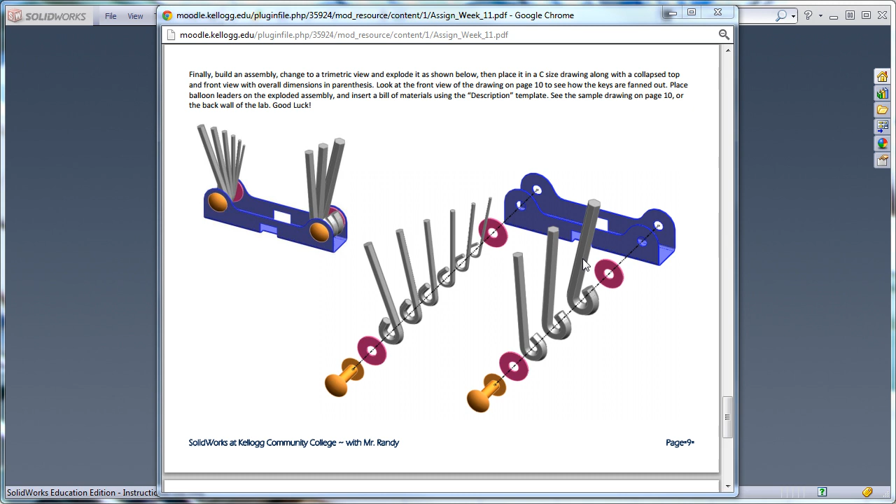So again, the final output, always good to see where we're going to end up. It will be a C-size drawing with a couple of 2D views and an exploded assembly with balloon leaders and a bill of materials.

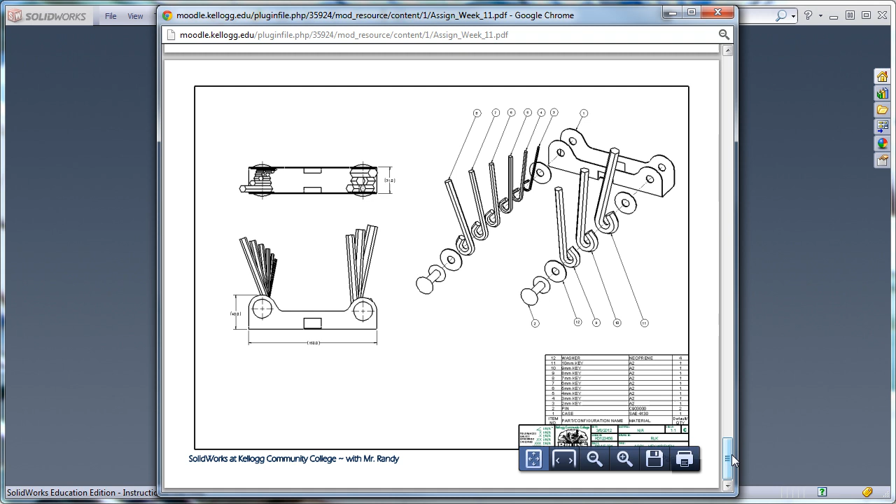And so this is where we're going to end up. I want to back up to the case and have you take a look at this first.

And what we're going to do with the case is we're going to extrude it. We're going to turn it into a sheet metal part, then flatten it so we can put these notches in and cut them, and then fold it back up.

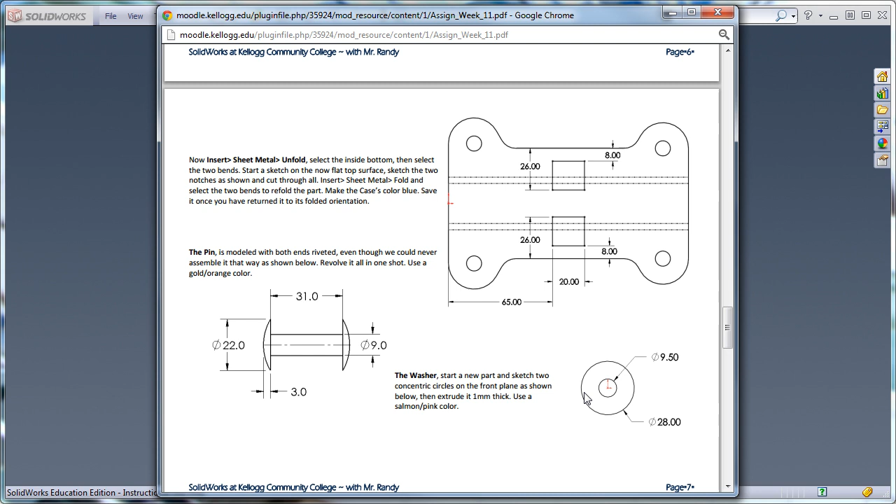The pin is a simple revolve, so draw half of this. Yes, you can get it right with just these 4 dimensions if you use relations properly. The washer should be the easiest thing you've done this year.

And then we're going to do the hex key. The hex key is actually going to be a sweep. So we're going to take this hexagon profile and we're going to sweep it along this path to get the hex key. And then we're going to create a design table, actually in Excel, to control the dimensions for the various hex keys.

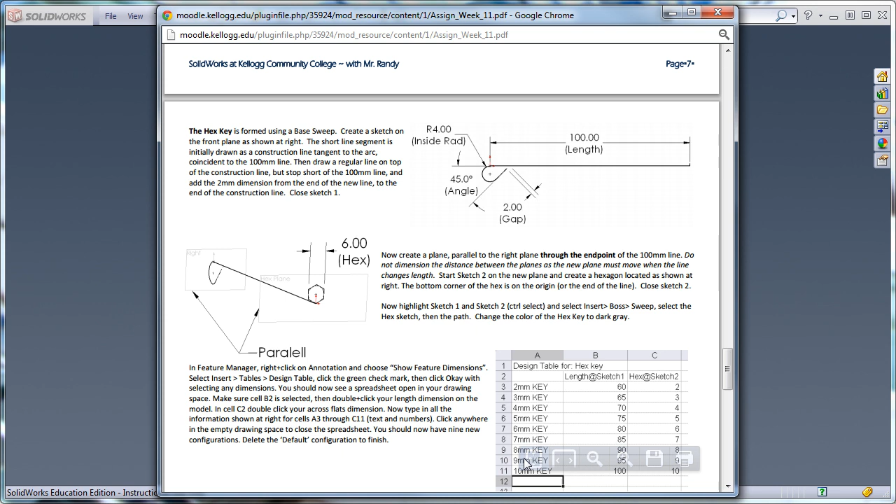So let's take a look at some of this here. Let me get that out of the way. All right, so let's start a new Solidworks part.

And we're working in metric for this one. And we're going to go to a front view and start a sketch. And I'm just going to real quick draw up the shape of that.

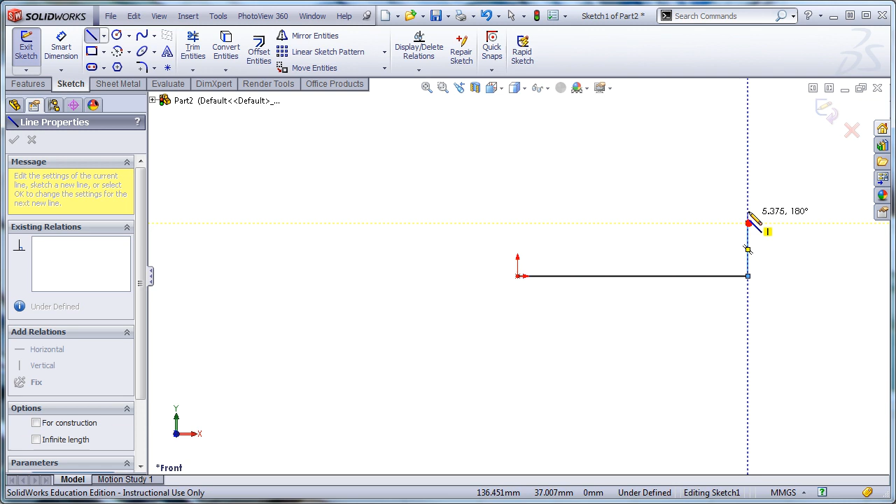Like so. And let's get some dimensions on here. I'm going to go pretty fast. You should be able to do this kind of stuff without too much trouble.

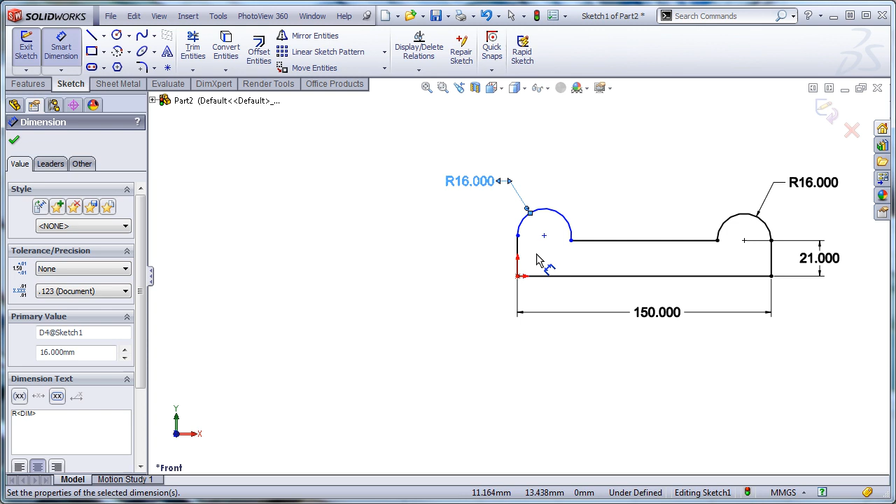And then we're going to draw a couple angled lines in here. And I goofed that one up, so I'm going to have to get a tangent relation in there.

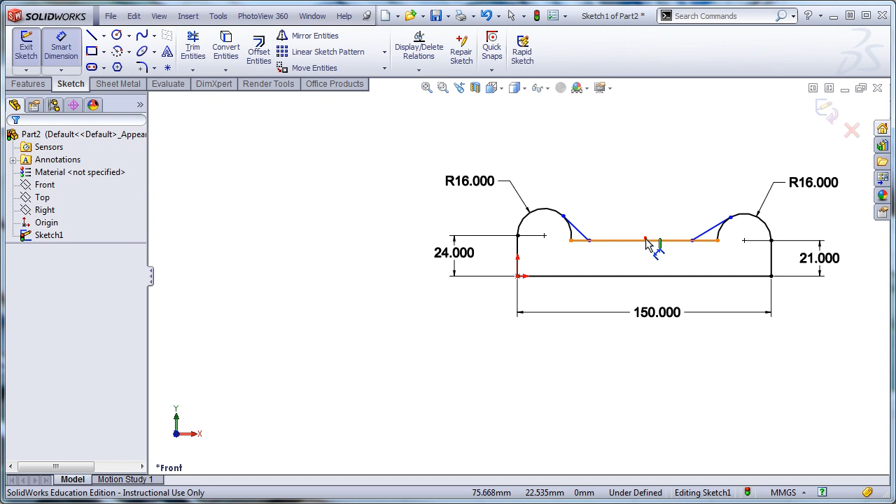And then we can do a dimension, so we can get this 120 millimeter or 120 degree for both of these.

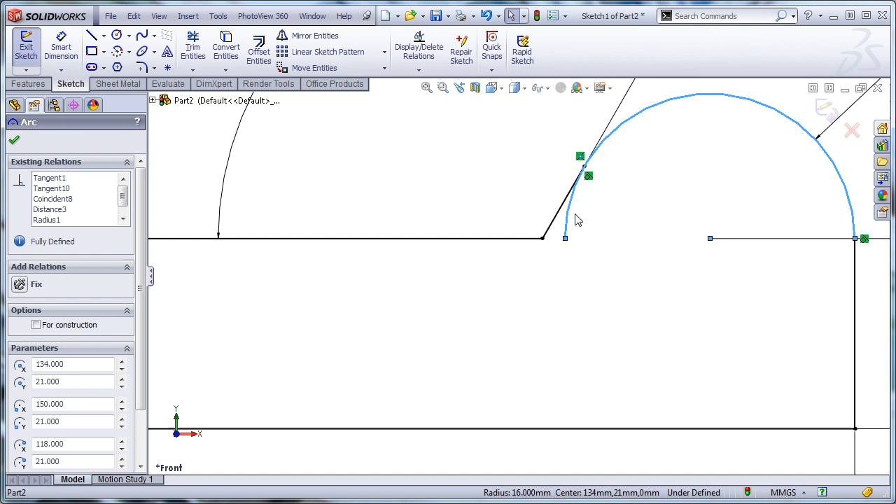Let's trim that up. Undo. And there's the outward shape of our case.

We're going to extrude that, 31 millimeters.

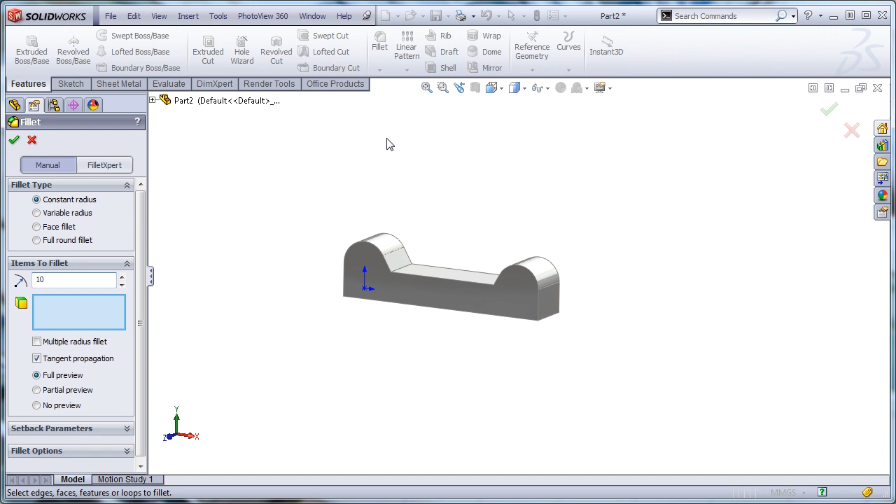Now we're going to apply a 10 millimeter fillet in here. So let's go to the fillet tool. You want to do this separately, it tells you that in your drawing notes, but make sure you read them. And we'll put a 10 millimeter fillet there and there. Doesn't work so well if you put that in the sketch.

Okay, next step is to shell this out. So I'm not going to cut the holes yet. We're going to do a shell, so we'll click on the shell tool.

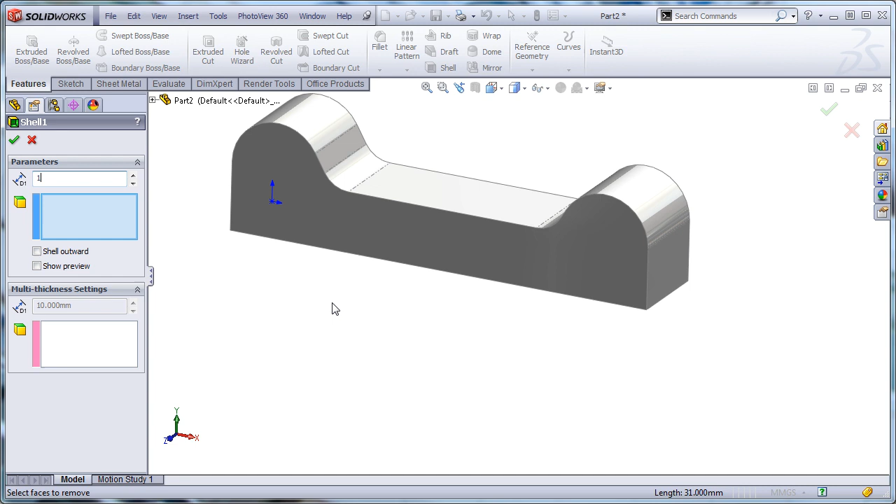You've used this before. The material thickness is 1 millimeter, and we're going to take out all of these faces, and finally that one, and we'll hit OK.

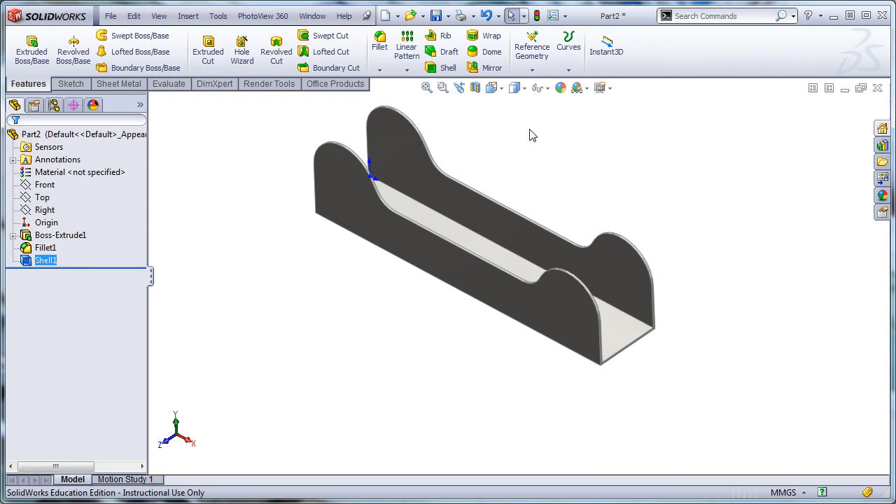So it kind of almost looks like a sheet metal part now, but it's not. Again, you have directions in your handout for this, but I'm going to show you how this works. I'm going to pick the bottom surface, and then I'm going to go to Insert, Sheet Metal, Bends.

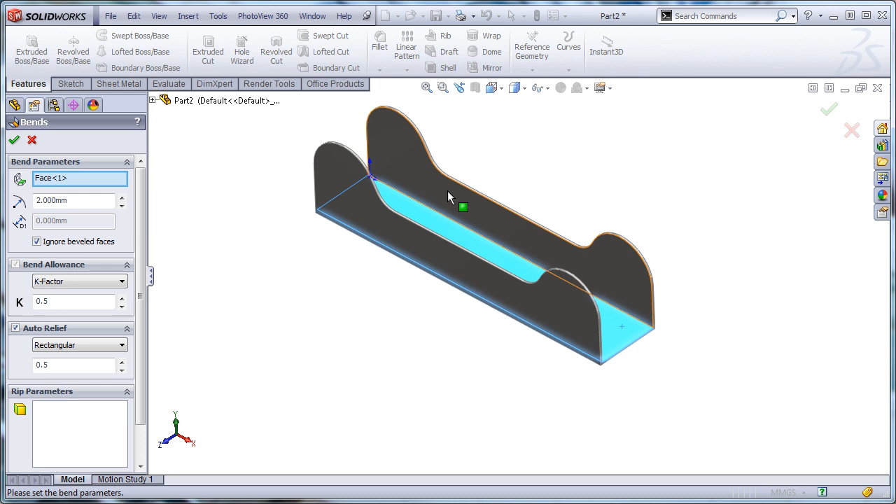We're going to set the radius at 2 millimeters. Material thickness should be given already by the thickness of the part, and we're going to hit OK. There are no rips or anything to deal with, and now this is a sheet metal part.

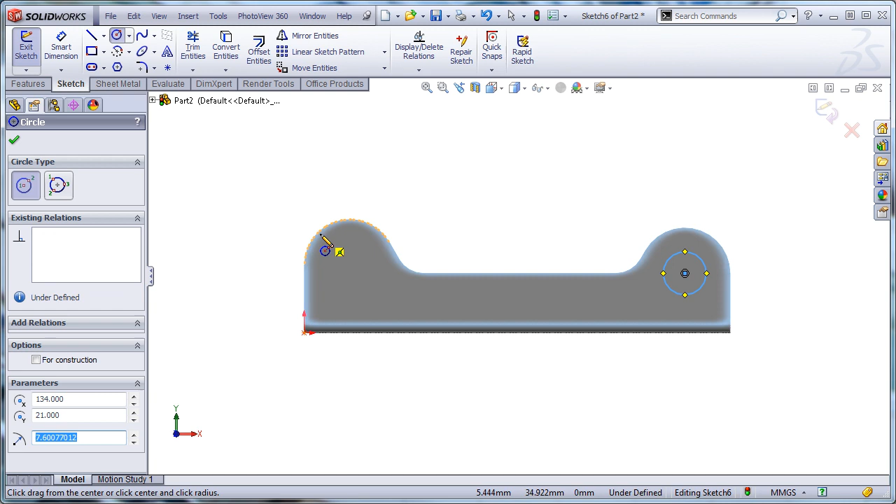Well, let's get the holes in there, so we'll sketch, and let's go normal to, and we'll do a couple circles here, concentric to those outside edges. Let's dimension one of them, and they are 10 millimeters, and we'll just equal relate them. Should be fully defined. We'll cut that through all.

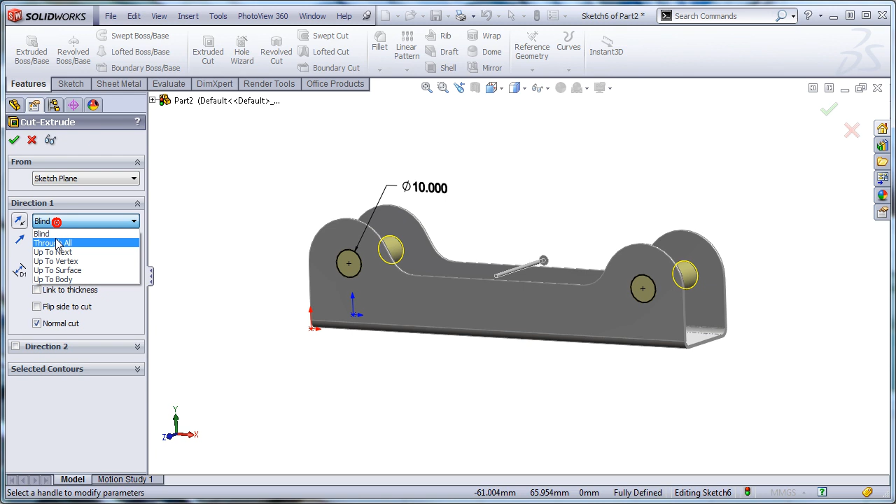Now we need to flatten this part out so that we can make the next 2 cuts. I'll drag this over for just a second. The cuts take place in the flattened state, so let's get that out of the way.

I have the sheet metal tab turned on right here. You can get that yourselves by just right-clicking and turning on the sheet metal tab. I've done that already. You can also just go to Insert, Sheet Metal each time to do these operations. I want to unfold, don't flatten - that does something very different from what we need here. If you flatten it, put those in, and then unflatten it, they'll disappear.

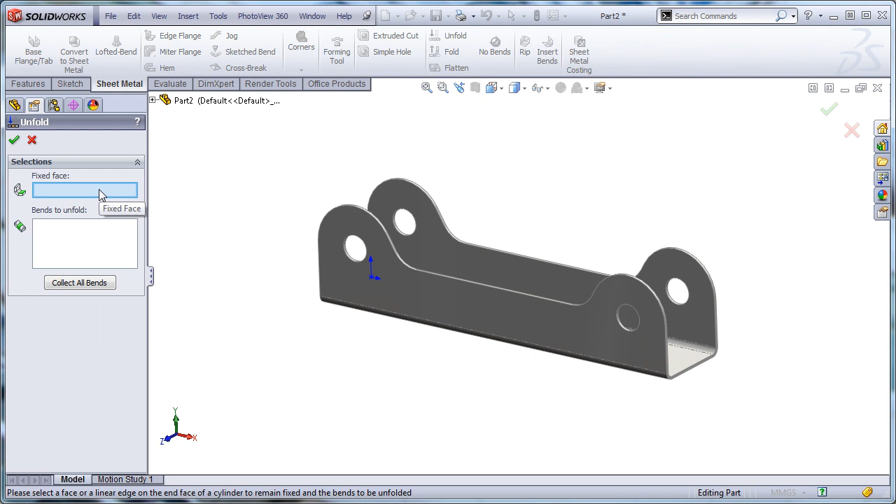So we're going to unfold. The dialog box is asking me for a fixed face. I'm going to click the bottom. And then for bends, there's only 2 of them, and I'm going to click both of them and hit OK. And that flattens the part out.

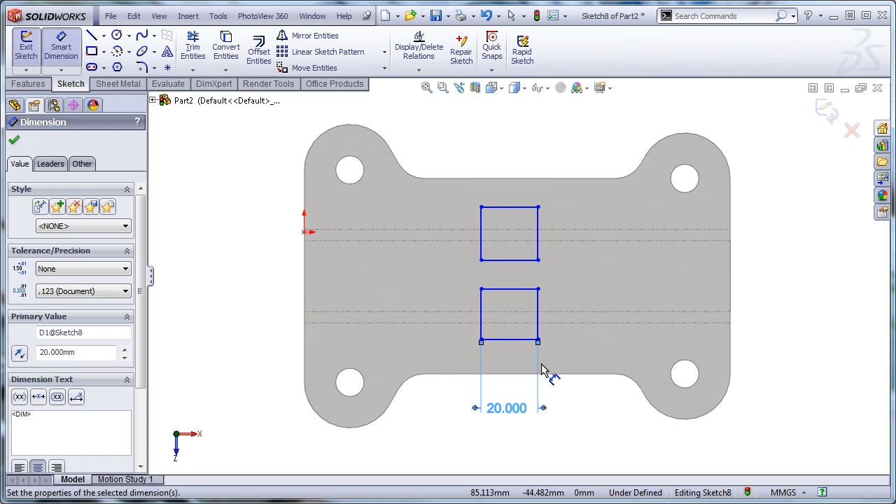Now I can sketch on this surface. Let's go normal to, and we'll draw a couple rectangles. We'll make these collinear. And we'll real quick get some dimensions in here. This is 20 wide, 8 millimeters, and from the edge to the top, 26. And finally, 65 millimeters over from the edge.

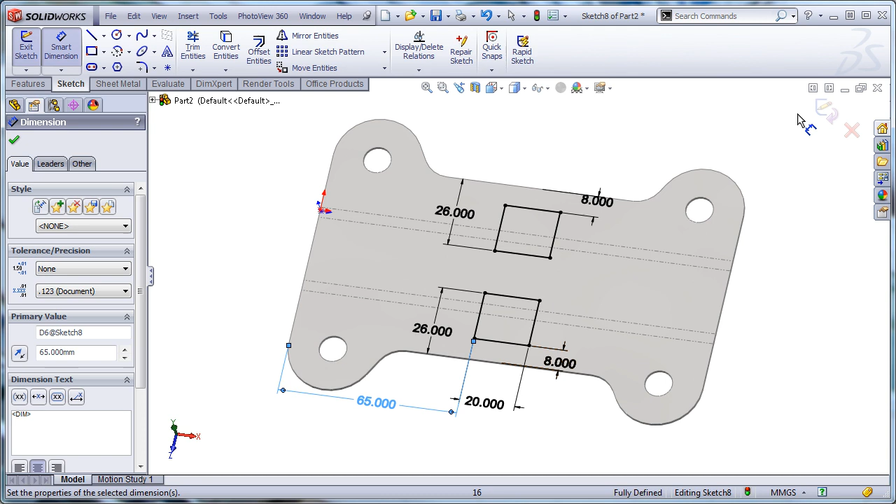Now we're going to cut these, and we cut a little differently when we're in sheet metal. I'm going to do an extruded cut, and instead of giving a distance or anything, I'm just going to say link to thickness. Then you never have to give a distance for a cut or anything. Technically it's through all, but in sheet metal we prefer to just link to thickness. We'll hit OK - that puts those 2 cuts in there.

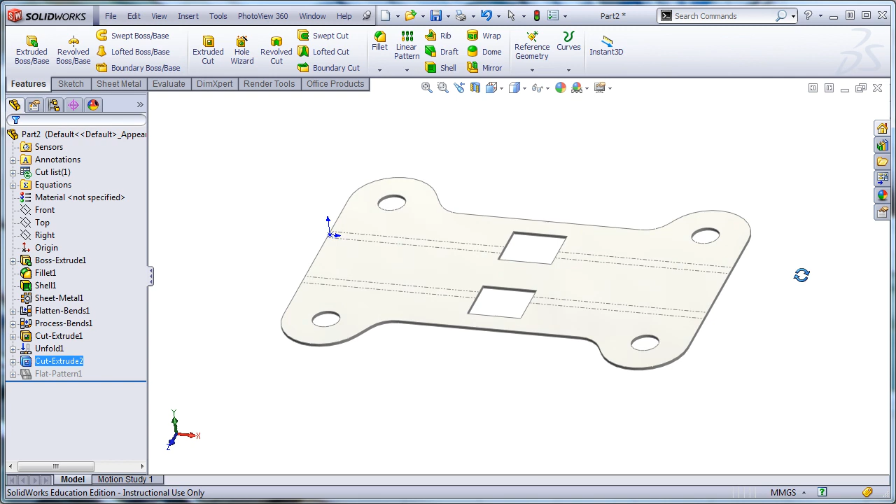Now we want to fold back up, so we're going to go to the sheet metal toolbar. We're going to fold and just pick both those bends and hit OK. And there is the finished case for you. All right, I'm going to close that case model. We don't need it anymore.

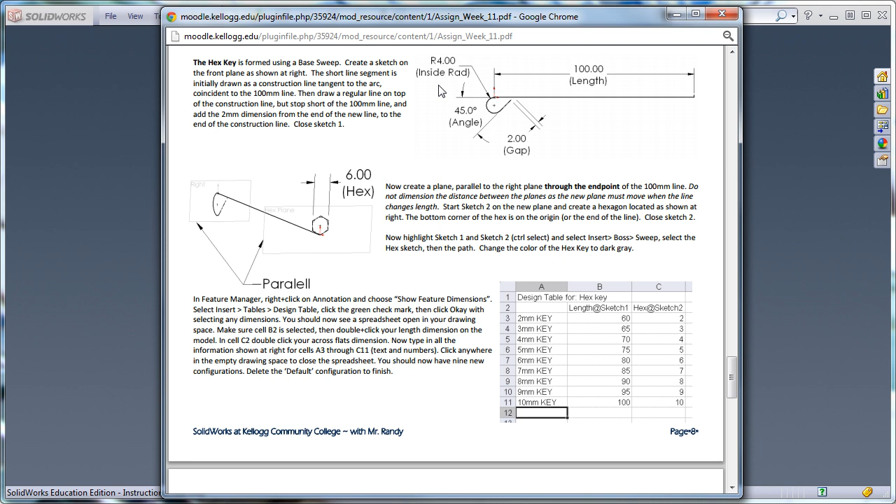And finally, I'm going to show you how to create one of the hex keys and put it in the design table. So again, you can read the directions. I've given you a lot of verbiage here on how to get through this, but I just want you to see it. So we're going to create this part.

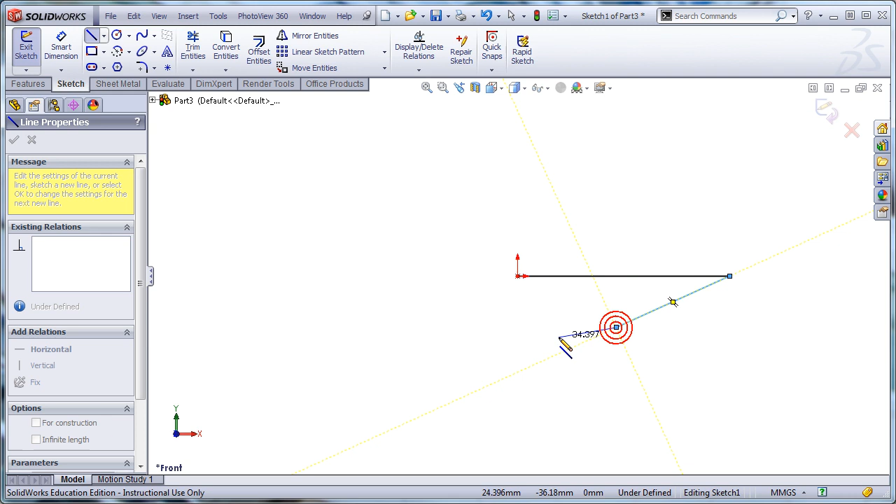I'm going to go to the front plane on a new part file here and start a sketch. I'm going to draw from the origin, and you'll see this in the pictures, a straight line. And then we'll do a tangent arc, loop around a bit, and then once again we'll do a line, and we'll follow that tangent witness line there. That should create a tangent relation for us.

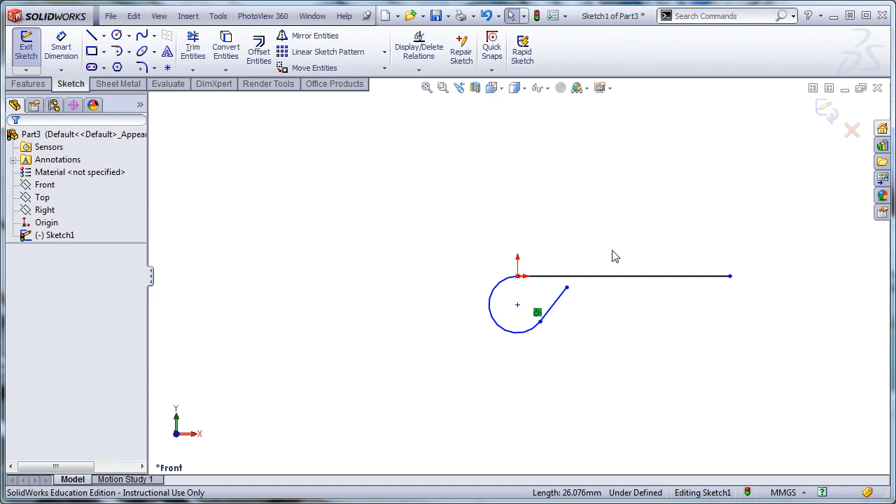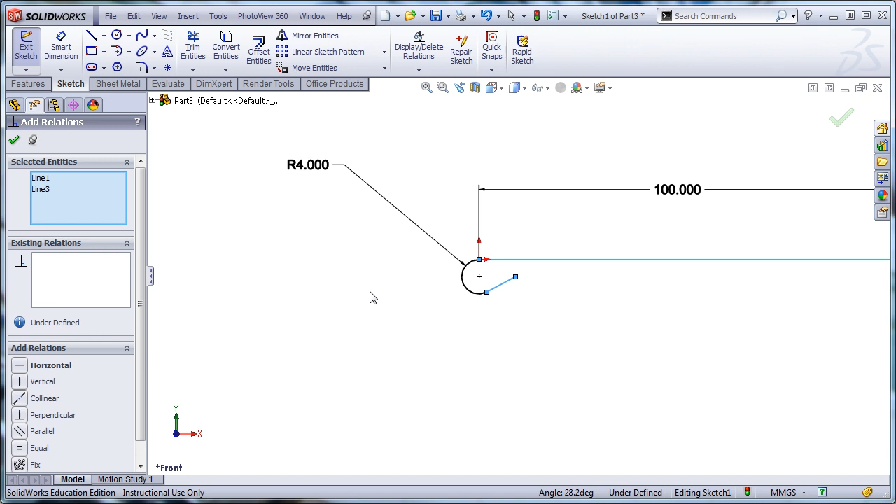We're going to dimension this, so let's dimension. It's 100 long, and we have a 4 millimeter radius - it's going to be pretty tiny. I'm going to shrink that down and get this shrunk down like that. We're going to put an angle dimension in here. Oops, let's try that again. If I'd hit the right button - there we go, dimension tool.

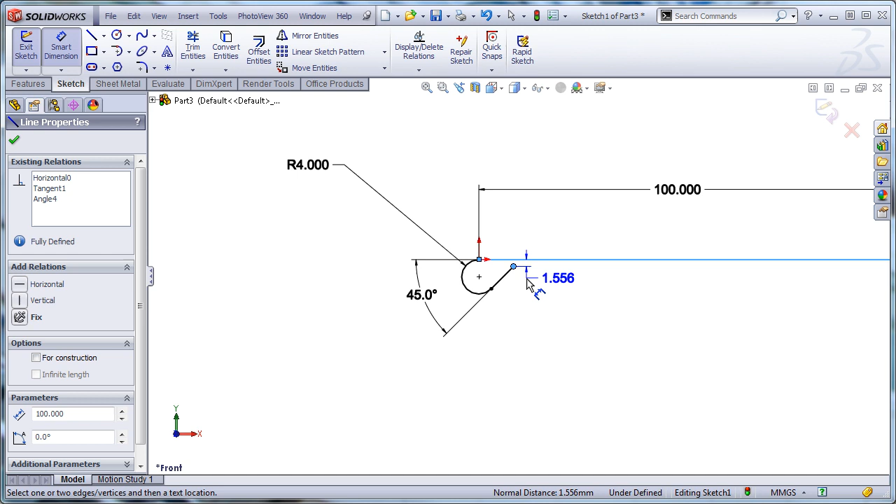45 degrees. Now, the one interesting thing is there's a 2-millimeter gap dimension here in the drawing, and there's no way for me to dimension that from here. If I try to put that dimension in, I get something like that, and that's not the 2 millimeters that we want. What we want is the 2 millimeters point to point here. And I did that on purpose just to show you another drawing technique here.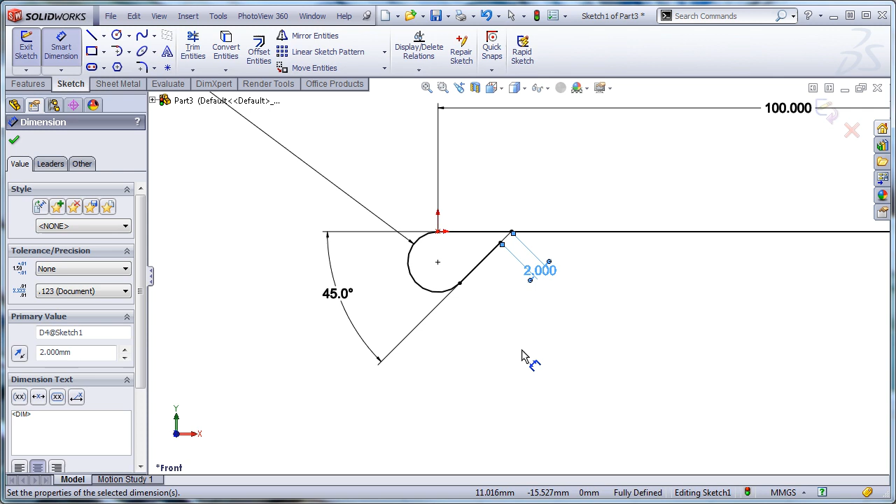So let's get out of there, and I'm going to back this up a bit. Let's get out of the dimension tool. And I'm going to draw a center line, like so, and hopefully they are collinear. Oh, it's tangent - that'll work. And now I'll put a dimension in for the length of that line at 2 millimeters. And that accomplishes my task there.

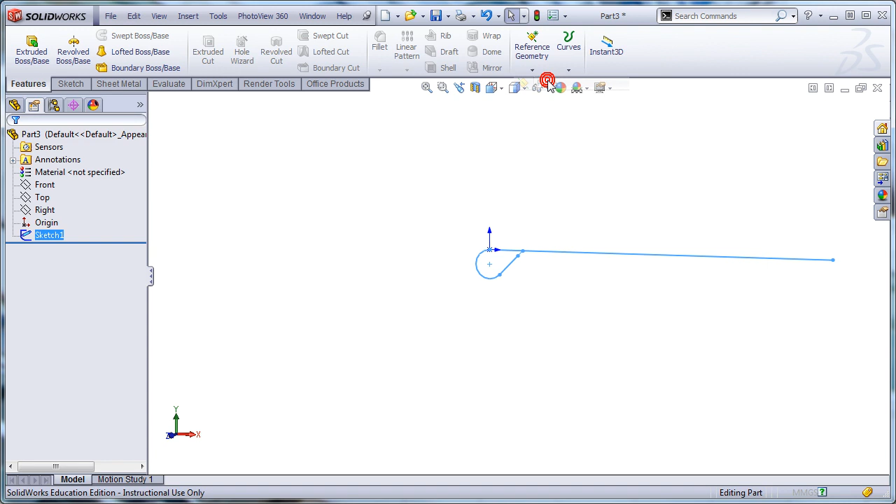All right, so I'm going to close that sketch. Now, I need to create a plane, and this is a real careful step. Read your directions - the plane has to be attached to this endpoint. Do not, when you create the plane, put a 100 millimeter dimension in there - your part will fail when this line changes lengths. So we're going to go to Features, Reference Geometry, Plane Tool. I'm going to pick the right plane here, and then I'm going to pick this point. No dimension, and hit OK.

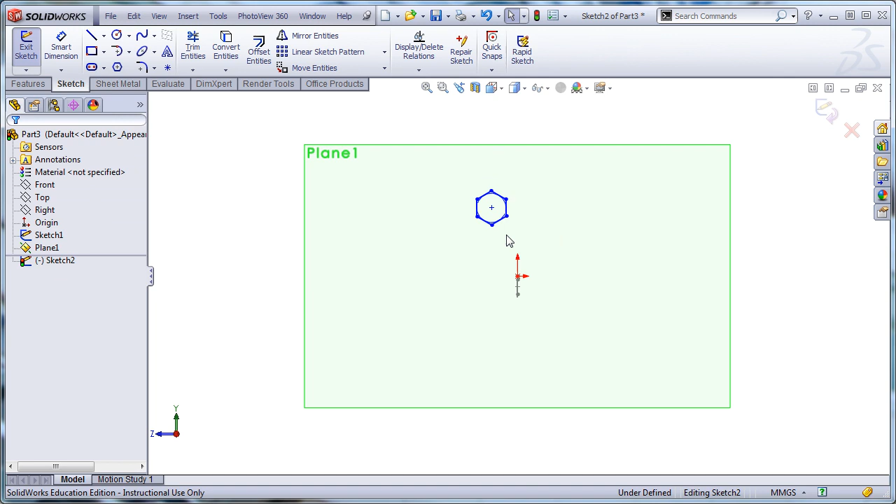All right, we're going to sketch on that plane. Let's go normal to. I'm going to draw a hexagon out here in space. And I'm going to first of all click an edge and make it vertical. And then I'm going to create a relation between those two pieces of geometry.

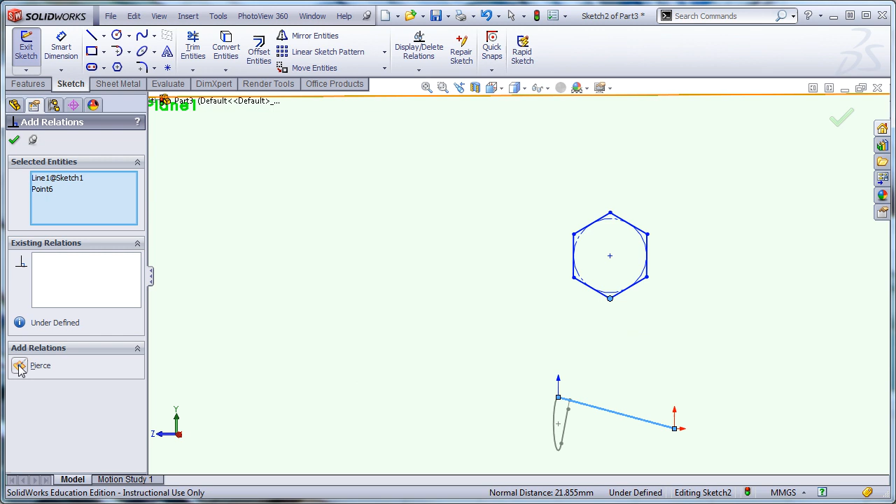And we can pierce, you may get a coincident option, that would also work. Then I'm going to place a dimension across here, and we'll just stick a number in there. Doesn't matter which size it is because the table is going to take care of that.

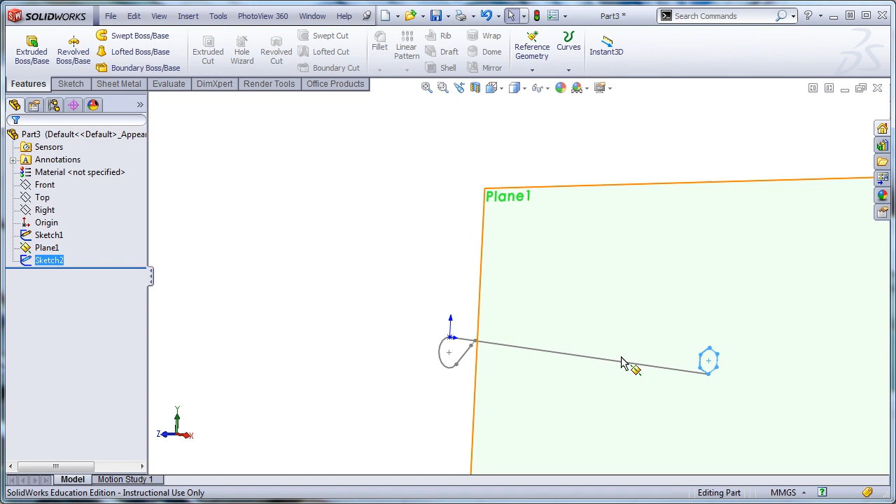So now we have a sketch here of a hexagon and a sketch here of the path. We're going to do a sweep, so we'll come up here to Swept Boss. The profile is this sketch, and the path it's looking for is this sketch, and it's going to sweep that shape along that path. We'll hit OK.

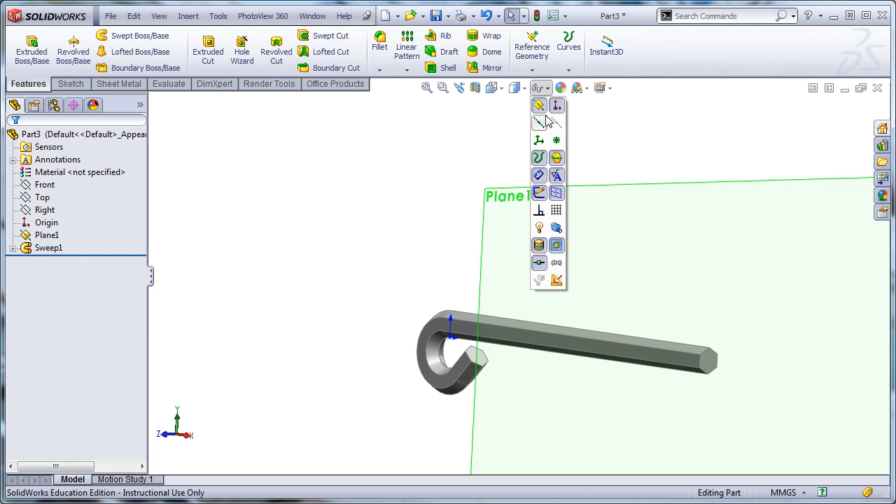Let's get the planes out of the way and take a look at this. Now, one other thing you'll notice here, I'll show you how to do this, is that I've changed the name of this dimension to say length, and I've changed the name of this dimension to say hex. The others don't really need to be changed because they're not going to be in the table. But it'd be nice to change these two dimensions, so let me show you how to do that.

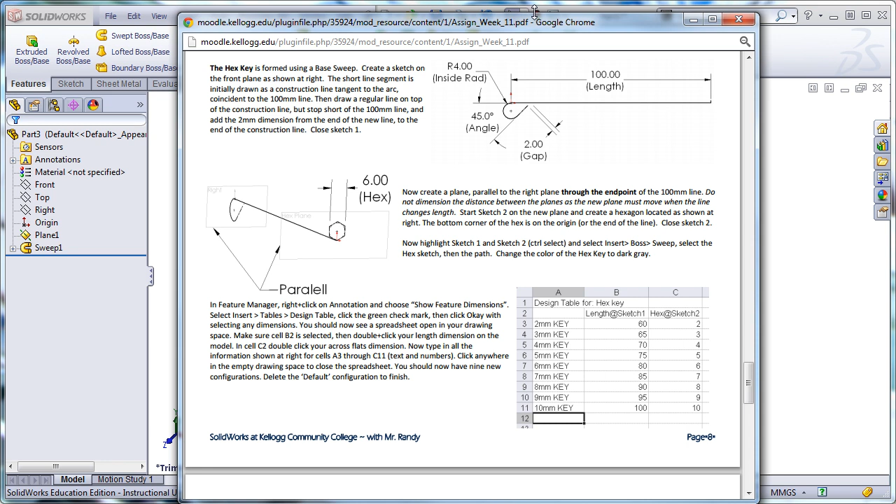And then we're going to do a design table here. So I'm going to just double click on Sketch 2 and click on that dimension, and let's see if I can do this outside of the sketch. We're going to call that hex. And then we'll double click on Sketch 1, click on that dimension, and we're going to call that length. Hit OK.

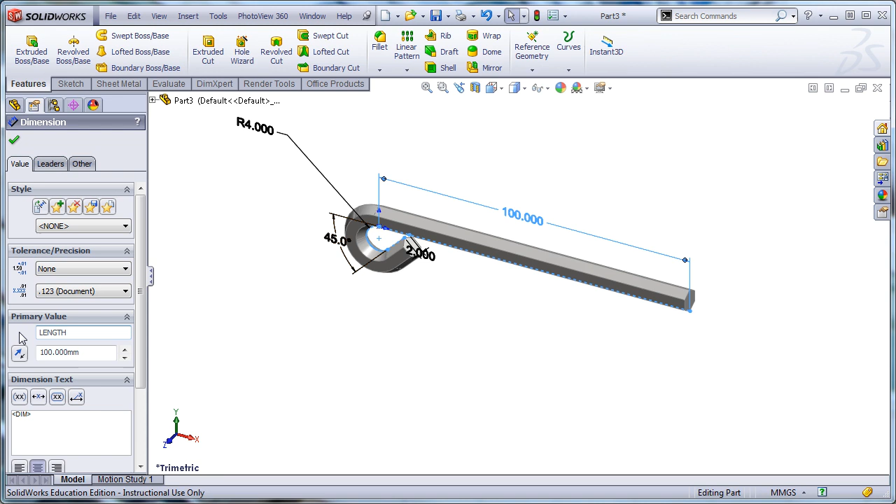All right, we'll see if that works. So here's my part, it's all finished. You'd probably want to save right now in case you crash the drawing in this next step, but I'm not going to worry too much about it.

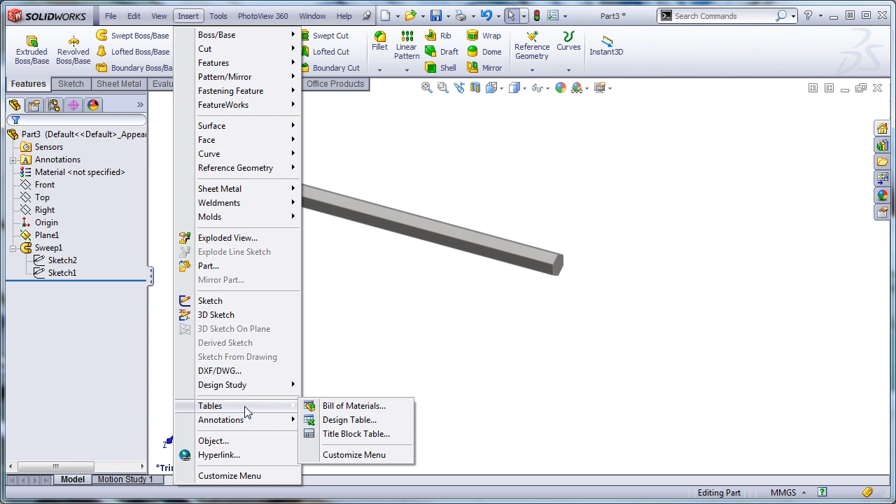We're going to insert table. There we are, sorry, they've moved it. And then design table. We'll just start with a blank table. I'll hit OK.

So I'm going to hold my control key down, press the wheel, and pull my mouse like this. I'm going to double click on sketch 1 - it's not really what I want there. I'm going to double click on this dimension, and you can see length from sketch 1 came in.

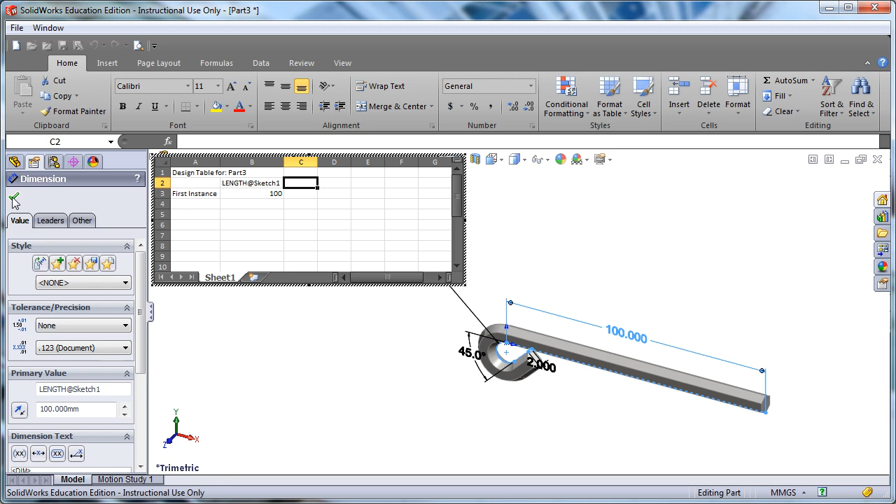Let's click on sketch 2. I'm going to delete that and then double click on this dimension. And that popped in, and notice it brought in the values automatically.

Now, in the row or column A, starting in cell 3 here, I'm going to give the part numbers. So it's 2mm key, 3mm key. Sometimes you can drag this and it'll automatically fill in, but it's not going to do that for us, so that's all right. 4mm key. I think you get the idea, I'm not going to do all of these, we'll leave it at that.

And then in these columns, you just put in the proper numbers. So we'll say 60, 65. This works pretty slick, you can actually put equations in - anything you can do in Excel, you can do in this spreadsheet.

And then the 2mm key will of course be 2mm, 3. This one I can pull down now, and it should... nope, it's not going to. All right, 4 and 5.

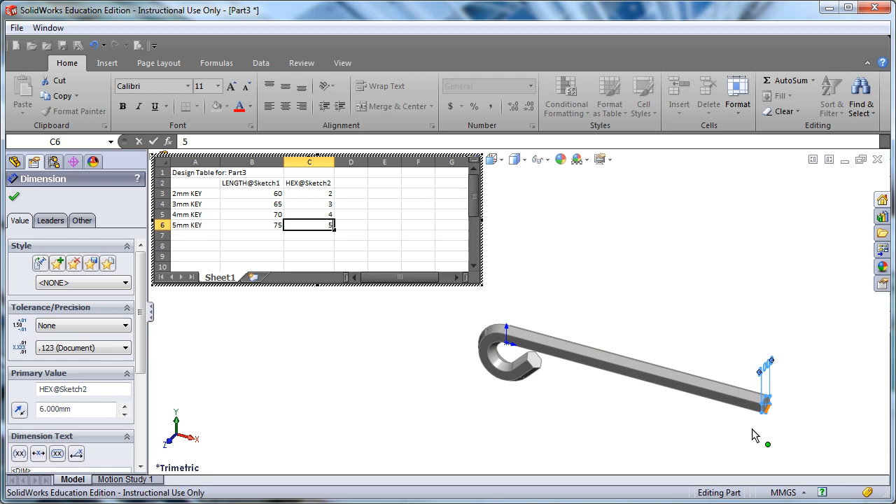All right, once you have everything in there, click anywhere in the drawing space to get out. So we'll just click out here. If we've done everything right, it's going to tell us it created some configurations for me. And now we can go to Configuration Manager.

And if I double click the 2mm key, it should get shorter and smaller. We'll double click the 3, the 4, and the 5.

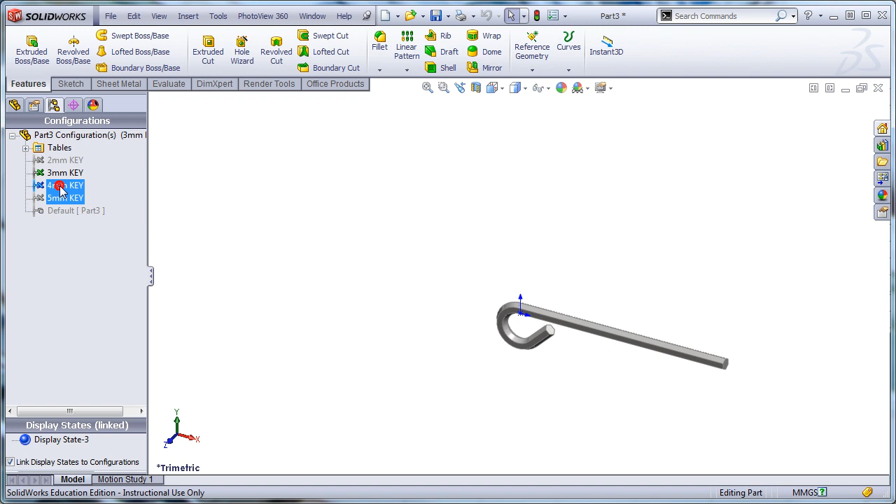Okay, if you have an error in your table, you can click the plus mark up here, and then just right click and edit the table. Takes you right back into Excel, and then you can make changes to the table here until you get it the way you want it. Do pay attention to case here in terms of the lowercase m's and the capital for key, because this will be showing up in the bill of materials.

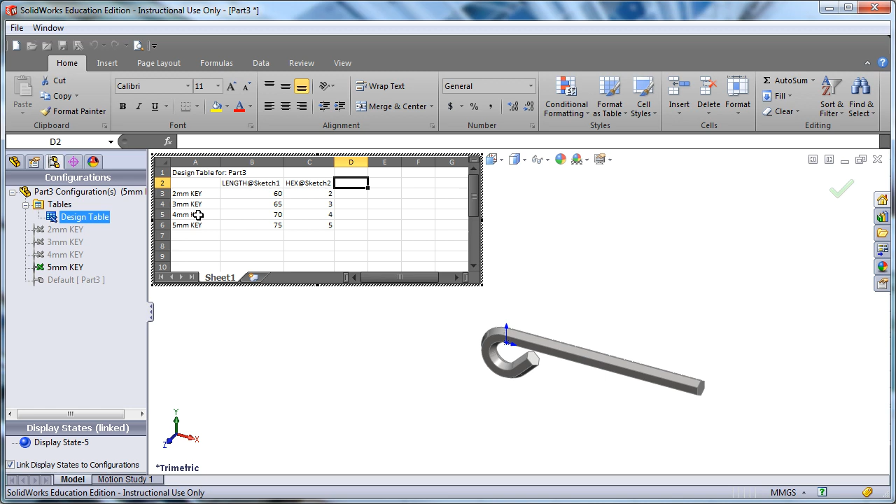Okay, so that's how you produce the key. Finally, when you assemble this thing, turn on temporary axes, because there is a little axis here for this part, and you can mate the axes to get everything lined up. So the assembly requires temporary axes on to produce this feature.

Good luck, this should get you most of the way through it. And as always, enjoy.